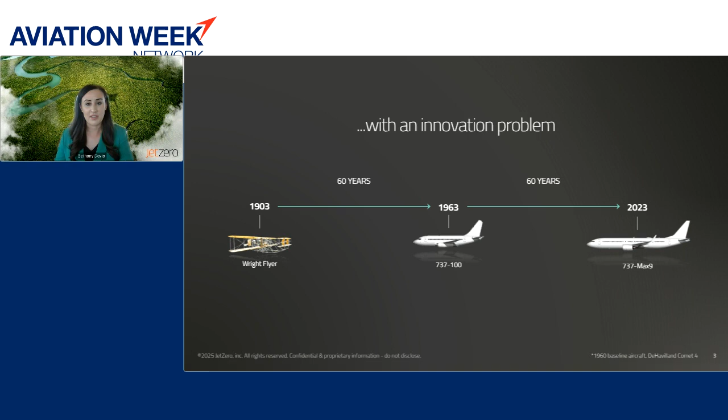But really for the last 60 years, the shape of an airplane has remained the same. So swept wings, podded jet engines, and pressurized cylinders. That isn't to say that there has been no innovation in aerospace in the last 60 years. Our avionics are dramatically safer. So we've added TCAS, TAWS, RVSM, ROAS, GPS, LPV approaches, and so much more that has added to the safety and efficiency of our aerospace network.

There's also been innovation in structures, back from dope and fabric to riveting metal, to riveting composites. And of course, our engines are much more efficient. But now the gains that we've had in the last 20 years have really come at the cost of durability and maintainability and profitability of our airlines. So we have to look at other places to innovate.

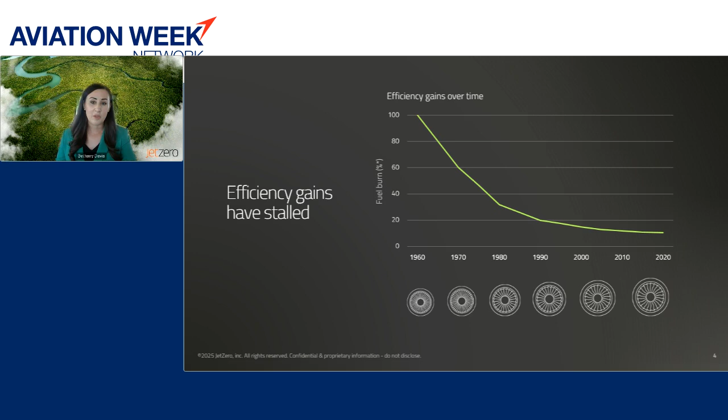And that's why we say the airplane shape is the innovation. It gives us, with existing technology, so existing engines, avionics, other airplane systems, a 50% reduction in fuel burn. And 50% is a huge number, especially when put in context of previous new airplane introductions. I've worked at an airline and the whole internal team was focused on how can we optimize our fuel burn. So saving low single digits is really a big impact.

So 50% is huge. So how do you talk about 50%? There's really so many different ways that we could show this. You can show per passenger, per mile, per trip. One simple way is really comparing monthly fuel costs.

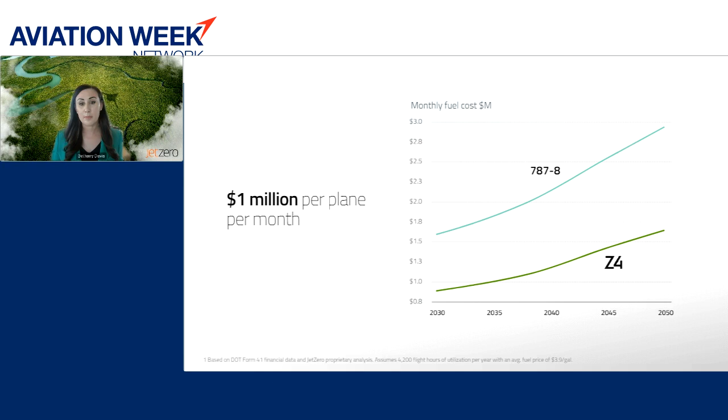So using the 787 as an example with our Z4 airplane, we can save the airlines more than $1 million per month per plane. But really, our plane will only have an impact if it's actually in service. So a major program requirement we have had is it has to fit into the existing infrastructure.

And by infrastructure, I mean both physical, so airports and airspace. So using the same existing runways, taxiways, gates, jet bridges. And when we talk about airspace, we mean existing altitudes, existing airspeeds, same navigation and communication procedures. But it also means the existing regulatory infrastructure.

So our airplane will show compliance to FAA Part 25 transport category airplanes, be operated by the airlines under Part 121, and be flown by airline transport pilots certified under Part 61 for airplane multi-engine category and class. So this is existing regulations. The goal is no new regulations, no SFARs for this airplane to really fit in between the airline's existing fleet of single and twin aisle airplanes.

And that's exactly where we've positioned our plane, is in the middle market. We see that the demand of the largest single aisle dominates the market for orders and deliveries. And we believe that providing airlines a middle market airplane really meets their needs. And there's currently no supply from the entrenched incumbents.

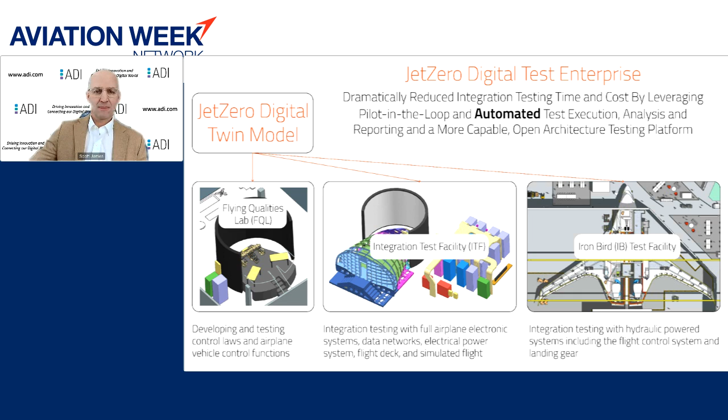Thank you, Scott. So yes, I'm Steve Landers, and I'm the head of labs for JetZero. And so what we're doing within our facility is we're building several different test labs to help accelerate the development of our airplane program. We have the Flying Qualities Lab, which is a simulation-only based, fixed-based operator type simulation. We have the Integration Test Facility, which is the avionics and electrical system test facility.

And then the Ironbird, which is the mechanical and hydraulic and landing gear systems testing with full-up aircraft level hydraulics in the lab environment. And so all of these use a similar common backbone for the simulation architecture. And we're using these facilities to test and evaluate all the airplane systems before we get to the airplane.

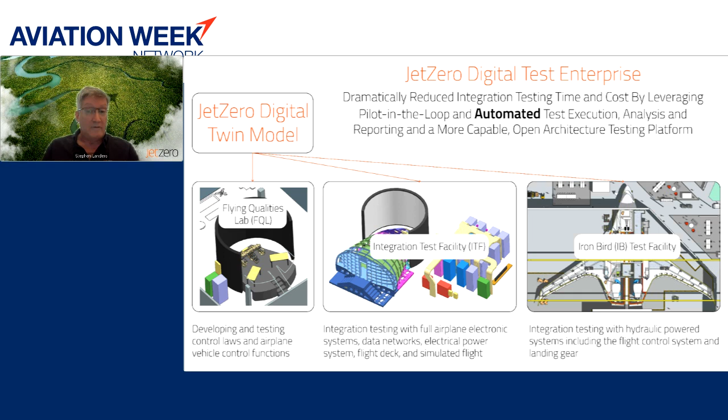And the benefit of doing that, of course, is that we try and eliminate all the mistakes, all the problems, identify all the troubles that we're going to have with data communications between the boxes and the wiring in between all those boxes before we actually get to the airplane, so we don't have to solve it on the airplane itself. That way, we also don't have to wait for the airplane to do the testing activities.

So you can see here on the bottom part the pictures of the Flying Qualities Lab. That's a picture from just a couple of days ago, where we actually have real structure in there, real similar secondary structures. The middle picture is the Integration Test Facility. Again, you see a very similar architecture to what's in the FQL. And we have all the avionics that we're installing into it. And then the Ironbird facility, we're in the process of building and designing all the structure for it. So we don't have a picture of it just yet. Okay.

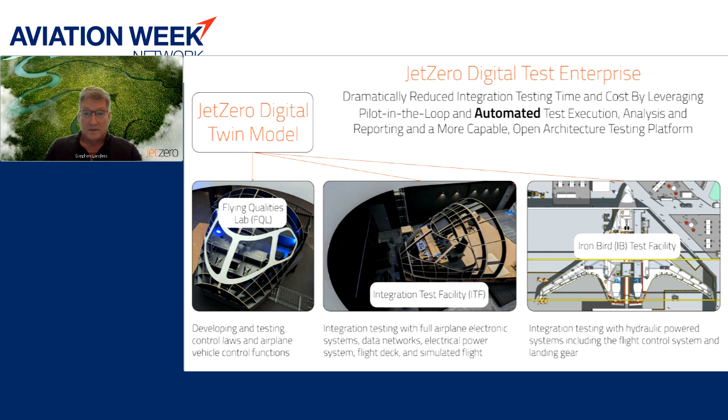So the concept of the labs, of course, the biggest one is that we're trying to support aircraft first flight activity by the end of 2027. And so the phrase that we're using for it is solving for time. We want to do as much of this testing activity away from the airplane before we get to the airplane as much as we can. And so what we are doing is taking the airplane wiring schematics and basically the point-to-point wiring diagrams for all the airplane systems.

And we're digitally modeling those in the FQL, which is a simulation-only facility. And then we're taking the same wiring diagrams, the same schematics, and we're actually installing those real wires to equivalent lengths into the Integration Test Facility and also into the Ironbird, so that we can do a whole series of testing in both of those facilities. And the same exact wiring diagrams are going to be applied to the airplane demonstrator, of course.

If there's any changes that are discovered, or any errors, problems, or things that we want to change, correct, or fix in any of the facilities, including the airplane, the wiring diagrams get updated, and then all of the facilities get those updates, and we continue testing so that everybody is in essentially the same configuration. This can greatly reduce a lot of risk for trying to do these things all at once on the airplane.

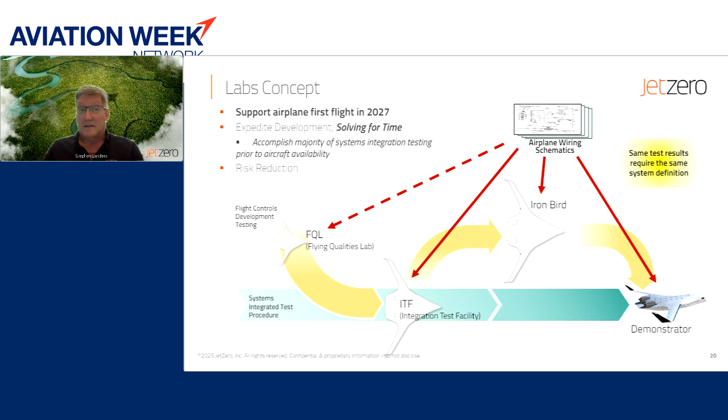And so in the lab facilities, we can do a lot of testing before the airplane's actually fabricated and before it's built. So lab facilities right now are in process, like you saw in the photographs. The demonstrator hasn't quite gotten to a state where we can do any real testing in that area. So the labs give us that time opportunity to do testing before the airplane's available.

And then we drive an out the window visual system so that it gives us a good pilot perspective as to what the flight crews will see outside of the airplane when they're actually doing their flying in the labs. Again, one of the other things that we can do within this environment is that we can inject all kinds of failures that you wouldn't want to put on the airplane.

So, we can put the airplane at 50,000 feet in the simulation, and we can shut down both engines and see what happens, see how long it takes to fly down to the ground, predicated on what our simulation assumptions are and all that. Stuff that you wouldn't want to do to put the actual airplane and the flight crew at risk. We can do those tests in the lab all day long, numerous times, and develop emergency procedures or other mitigation for any of those conditions.

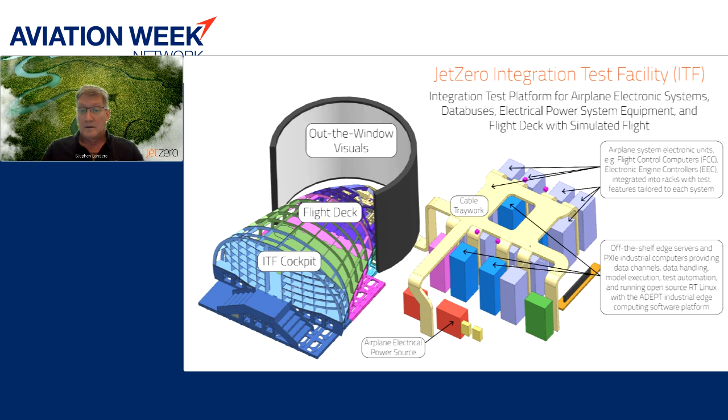Okay, so with our test process, our systems teams are generating requirements, which are stored. Our tool that we're using is Siemens Teamcenter. And so we've got a repository of all the requirements. And from those requirements, we're looking at building test configurations and initial conditions that we can automatically run within the lab to do a quick start basically for the simulation.

Additionally, we'll have test procedures, automated test scripts to run a series of tests that we want. Instead of having a human manually execute test procedures, we can run a script and run the same test procedure over and over again that can evaluate any changes much more quickly than doing something by hand with an interactive test procedure. So then all the results from those go into the test execution. So we run those with the automated scripts. We get data analysis and collection that is mostly an automated process.

And then all that can be taken with the requirements out of Teamcenter into report generation. And now we can go from having our test procedures to report generation in a relatively quick period of time for those kinds of tests that don't require time critical activities like flying an approach. You don't want to do that necessarily in a full digital accelerated mode, or some of the things that require human interaction. But we can do the other tests for other systems that don't require time critical events through an automated process.

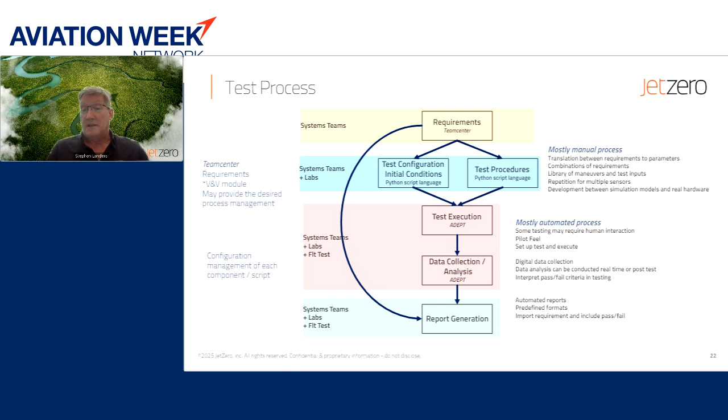So again, we have Teamcenter for our requirements. We're also using Teamcenter for the V&V modules and potentially even for some of the additional process management. And so we're doing mostly manual from requirements into test procedures and configuration, but most of the execution is all automated. And that's going to help us to solve for time.

So that's kind of the overview of this slide, which is the digital test enterprise, which Scott can talk a little bit more about here also. Thanks, Steve. Yeah, test automation really is the name of the game. Steve speaks about solving for time, and what we're really trying to achieve is tremendous cost savings during development, and then later on through sustainment of the airplane that translate into lower operating costs for the commercial and the military

operator. A high performance digital test enterprise needs to allow for fully automated test execution, fully automated data gathering, results analysis, and report generation. But the digital test enterprise must also support critical pilot in the loop testing. However, pilot in the loop testing can also benefit greatly from heavy automation. Automation of things like test initialization, doing cross-system readiness checks, other automated testing features, all in support of that pilot in the loop.

In this slide, we look at the use of a test sandbox approach, where simulation models, test parameters, test automation language source files, and the likes are checked out from a tightly controlled file repository, and then a distributed multi-server test framework is compiled. It's built into a deployable package of Linux executables, configuration, and connection files, and more. Test frameworks are then initialized, deploying the real-time apps across those distributed Linux servers that are in the labs that Steve showed us quite nicely.

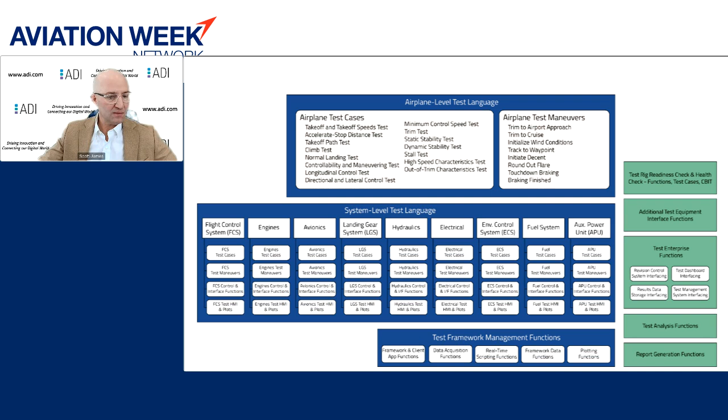So now we'll take a look at a new capability that we are working to develop in support of the JetZero test labs that we call the Test Pilot Digital Twin. The Test Pilot Digital Twin is an advanced capability allowing for a level of automated testing and a level of rigorous safety evaluation that is well beyond the current state of the art for civil and military aircraft today. And it is a great example of digital engineering technology that can be leveraged broadly to achieve tremendous return on investment.

But the pilot interfaces through those integrated systems, through the flight deck controls and indications, including, as Steve mentioned, side sticks, throttles, pedals, and so forth.

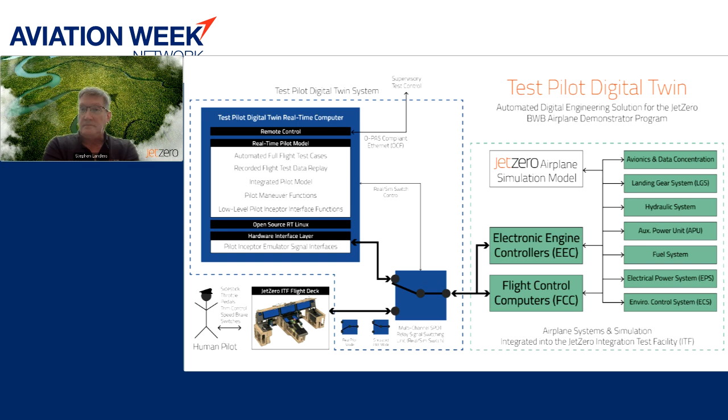Yeah, awesome. And it's worth mentioning that both Stephen and Bethany, in addition to their day jobs, are pilots. So they know a little bit about what they're talking about across the board. More than a little bit, I apologize.

Now, Bethany, I know you've got some really strong experience around how pilot modeling can be leveraged to improve the design and performance of the aircraft. Yeah, I think what's really exciting is, it's been an industry of modeling systems and doing the integration, but now creating that model of the pilot. Right now we design a lot of the systems, flight controls and control laws, and then the pilot tests it, which we will continue to do. But I think there's a really great step in between of modeling across a wide spectrum.

So the idea is that not just experimental test pilots can fly the plane, but a regular day-to-day line pilot is very comfortable flying this airplane. So having numerous human test pilot data points as a simulated digital twin is going to be a great help to us as we continue to refine how the system is designed, and not just come to the end and have a handful of human pilots doing those tests.

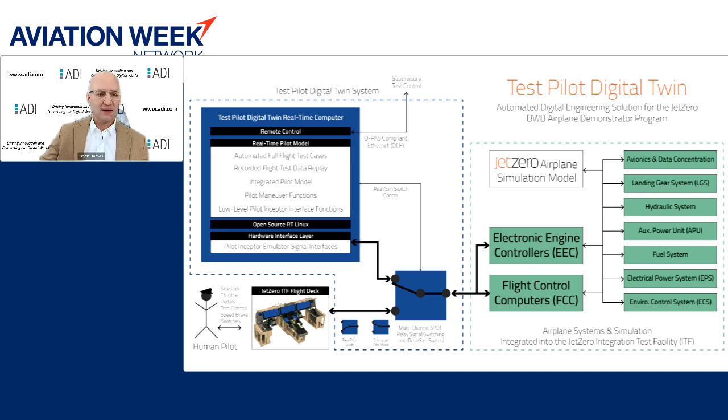Okay, and before we move on, I guess I'll hold it at this slide. Before we move on to a quick discussion of lessons learned, we wanted to touch briefly on MOSA, the modular open systems approach. I don't plan to give a primer on MOSA, so if you're not familiar, I apologize. This next minute is not for you. So please bear with us.

As I said earlier, we see MOSA as a rigorous systems engineering approach that starts by defining the system architecture and its data schema. And then that opens the door for the implementation of a highly advanced, highly automated digital test enterprise, like we've been discussing.

A well-defined system architecture and data schema allow us to design virtual test platforms and rig-based test platforms, like what we talked about today, that provide a modular COTS hardware and COTS software platform that will allow for MOSA compliancy to be driven. It'll allow testing for compliancy, and ultimately allow for one vendor's aircraft systems to be swapped out for another system with minimized integration and sustainment costs through that extended life cycle.

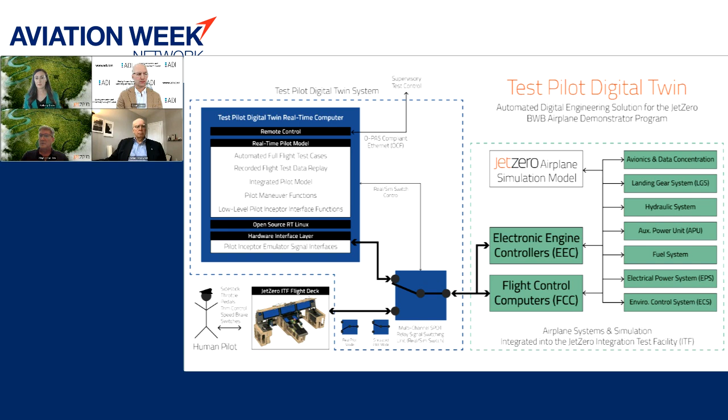It's been pretty tremendous to see how the design team has done their thing. Right, and just as a secondary from this slide here, the last real slide, we're using existing tools and existing systems and components and architecture that ADI has for our real-time simulation. We're just employing it a little bit differently than anybody else has previously. So it's not necessarily a new tool, but we're using it a little differently to its maximum capabilities.

So another question, this is a good one. Is there a plan to eventually go to an autonomous aircraft without pilots, or perhaps even with just one pilot? Bethany, I think that probably falls in your wheelhouse. Absolutely. As I mentioned, a key JetZero program requirement is fitting into the existing infrastructure, and that is existing regulatory infrastructure as well. So if and when the FAA has an ability to type certify single pilot or automated pilot, or there are operations with op specs in 121, JetZero's initial development will continue fitting inside the existing regulatory infrastructure. So that is 2 pilots on the flight deck, and obviously more as you get longer range.

So what do you envision as your cruise altitude for this aircraft at the moment? What's the thinking on that? It's existing altitudes, but our plan is to certify up to flight level 450. So initial cruise altitude can be either 39 or 41, above the existing airline traffic, but not in unfamiliar airspace territory.